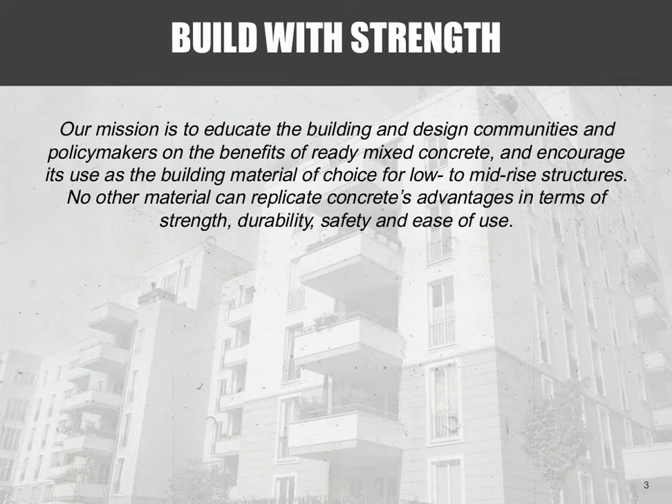For those of you who are not aware, we are Build with Strength, a coalition of the National Ready Mixed Concrete Association, and again, today we'll be focusing on a core attribute of concrete, resiliency, especially in the face of natural disaster. Specifically, one of the things that brought this to mind, and the reason why we're doing a webinar, has been the devastation brought on by Hurricane Matthew hitting the southeastern United States. But for those of you who are familiar with this, we know this is nothing new, and that cost from Mother Nature's destruction has been seen in all regions of the country.

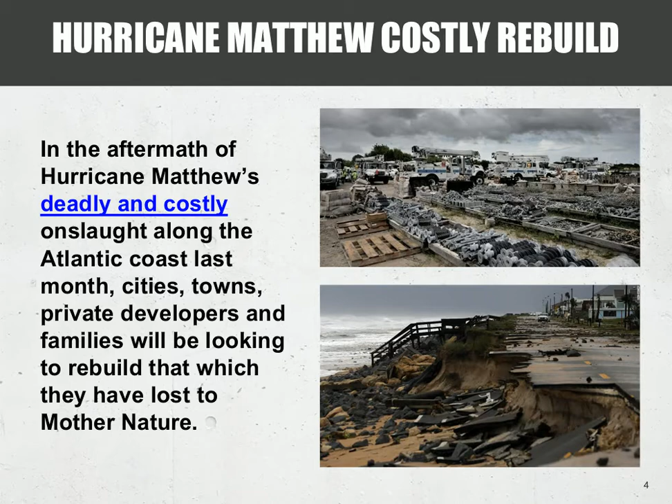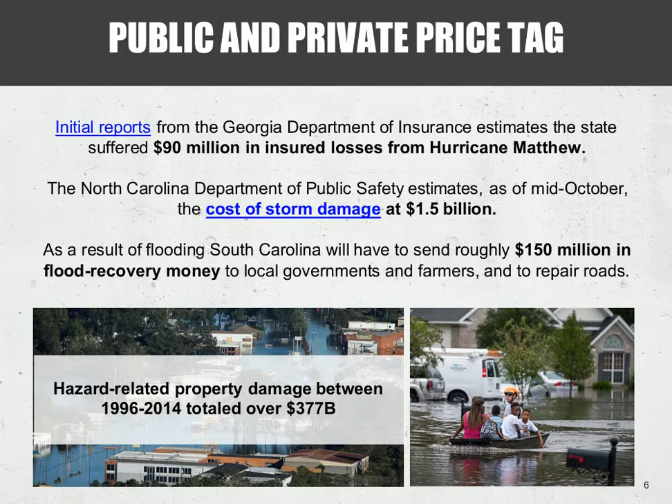Specifically, when it comes to loss of life and property, we've seen reports from all over the Southeast, starting in Georgia with $90 million in losses, North Carolina with $1.5 billion, and South Carolina with $150 million. More generally, between 1996 and 2014, there's been $377 billion spent on rebuild efforts because of destruction.

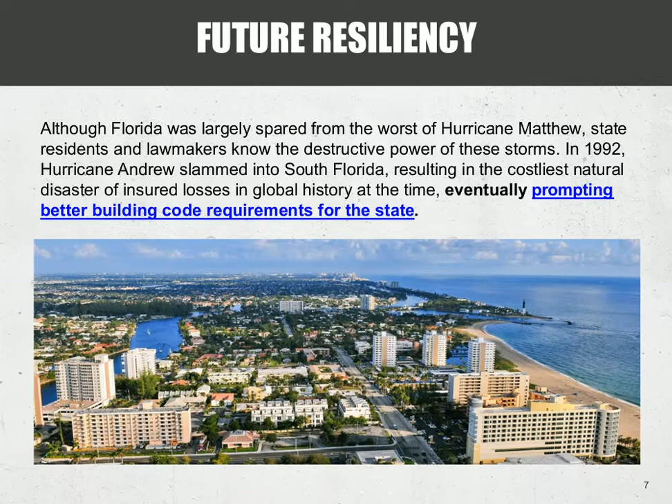We know a lot of these places and municipalities have already started thinking how they're going to rebuild, and what we're here today to urge people to do, and what we're going to continue to urge people to do, is to rebuild in a manner that really takes into account the future, not just the here and now. And the way that you do that is by thinking about resiliency. One thing that we saw in Florida after Hurricane Andrew, for instance, were laws put into place for better building codes with resiliency in mind, not just speedy recovery, but long-lasting recovery and cost savings.

We brought today with us on this webinar Dr. Jeremy Gregory from the Concrete Sustainability Hub. Now I'm going to turn it over to Jeremy to talk about the science behind hazard mitigation and the science behind building with strength. Dr. Gregory? Great. Thanks so much, Kevin.

Can everyone hear me? I'll take that as a yes. I hope so. Okay, good. Thanks. All right, so I'm really glad to be here.

As Kevin said, we've been thinking a lot about resiliency and how you quantify that. And what's interesting, we are the Concrete Sustainability Hub and spend a lot of time thinking about concrete, but concepts like resilience can actually apply to many different systems. What I'm showing in this chart is basically what we mean by resilience. On this chart, the x-axis is time, and the y-axis can be the performance of any kind of system.

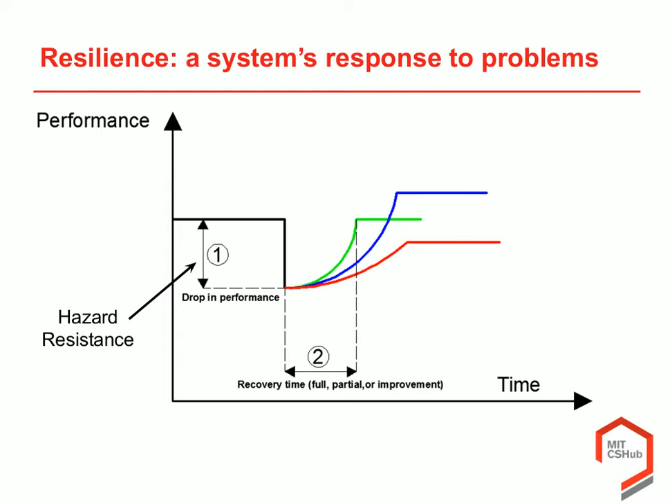We use a really specific term, hazard resistance, to talk about that initial drop in performance, and that's really what I'm going to be talking a lot about today: hazard resistance for buildings. If you go to the next slide, our research is really motivated by taking a life cycle perspective to be able to assess resilience and hazard mitigation.

And I think one of the challenges is that when we think about buildings, and let's say we're talking about a residential structure here, you may end up doing a comparison between two alternative designs, one that's built to a lower design standard and one that's built to a higher design standard. They may look exactly the same from the outside and be in the same location, but presumably the lower design standard is going to have a lower initial cost and the higher will have a higher initial cost, but they'll have different performance over their life cycle.

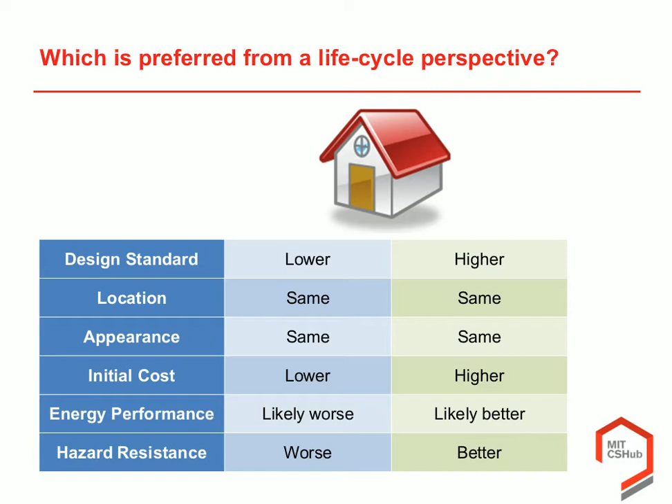The lower design standard will likely have a worse energy performance and a worse hazard resistance. The real challenge in the research is basically how do we quantify the benefits of that higher investment over time, and then how do we incorporate that into decisions. So on the next slide, I'm going to show what we've done in the hub, and that is to try to incorporate, in particular, hazard resistance into a life cycle cost approach.

So a life cycle cost analysis, as the term implies, quantifies all the costs associated with a building throughout its life cycle. So we include those initial construction costs for building the building, its energy consumption, wear and tear, doing repairs over time, but what we also include is costs associated with repairs due to hazards. And the way that we do that is combining the probability that a hazard will occur with the damage that would likely occur from that hazard. So what we include in the life cycle costs is basically costs due to repairs from hazards. And on the next slide, I'll get a little bit into how we do that.

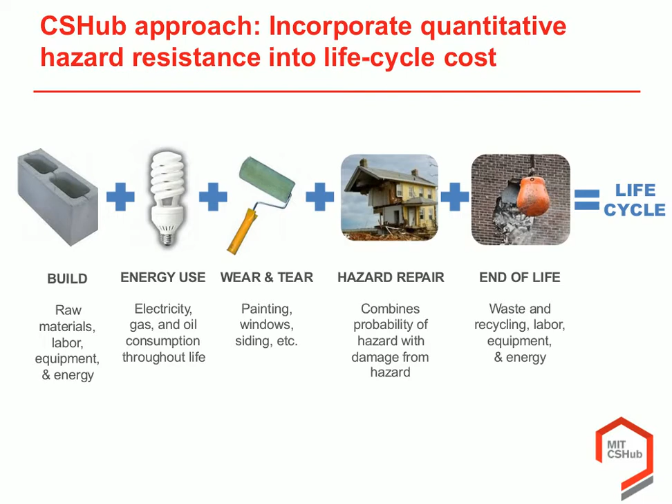Essentially what we do is we start with the probability that a hazard will occur. And if you could just advance to that next slide. We start with a probability that that hazard will occur, and we get this from government data that basically says here's the likelihood of a hurricane of a particular intensity, and then we combine that with what are known as fragility curves for buildings. And these basically say for a particular intensity of hazard, here's the likelihood of damage.

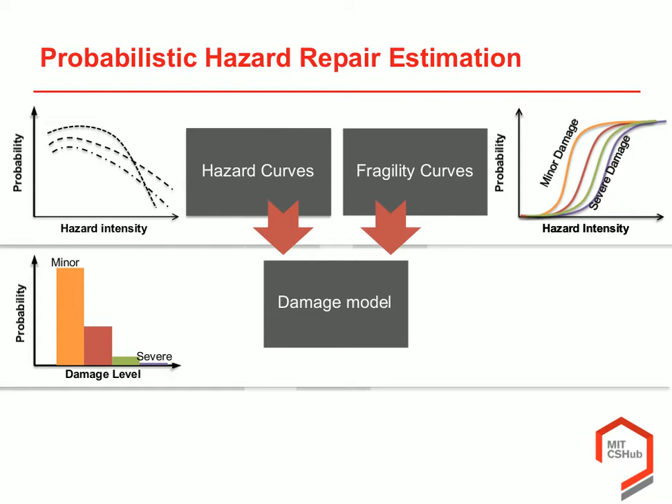We combine those, and then basically over an analysis period, like 30, 40, 50 years, we say here's the likelihood of damage to that structure from a particular hazard. So we can say likelihood of minor, moderate, or severe damage, and then also say here's the amount of costs associated with doing repairs to that damage. What we can do is then combine those into that life cycle cost analysis to say here's the initial costs associated with two different alternatives, and then here are the life cycle costs associated with doing repairs over that life cycle.

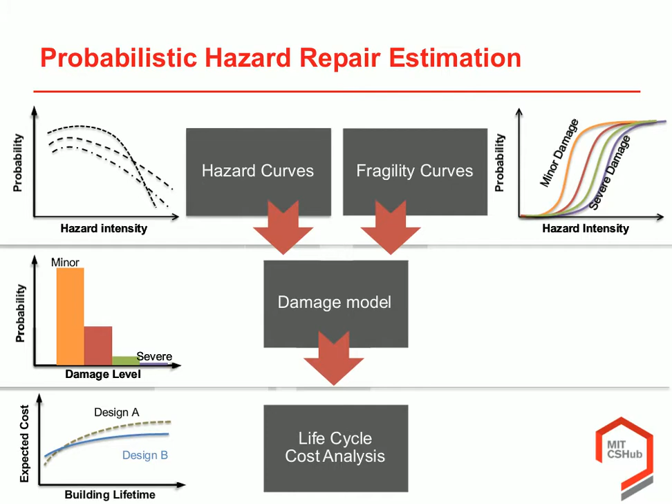So people are used to thinking about a payback period for things like appliances or utilities where you have higher initial costs but then lower operating costs. We don't usually think about that for buildings, and that's what we've been trying to do in this space. So let me show you an example of this in the next slide, where we looked at a residential structure in 3 different locations, San Francisco, Charleston, and New Orleans.

And in each location, we looked at a minimum standard design and an enhanced design that had been enhanced to mitigate against the impacts of hazards. Now, San Francisco has earthquakes, New Orleans has hurricanes, and Charleston has a little bit of both. And what this chart is showing is the life cycle costs associated with each of these buildings. So red is the initial cost, green is costs associated with energy consumption, the purplish colors are associated with standard maintenance and then more substantive improvements, and then the blue colors are related to maintenance or repairs due to hazards, either due to earthquakes or hurricanes.

And what's hard to see is that there's a darker blue color associated with earthquakes, and in this case, you can't even see it in San Francisco. And that's mostly due to the fact we're talking about a residential structure in San Francisco, and that there's a small likelihood of earthquakes occurring. I think this chart would be very different if we were talking about taller commercial structures.

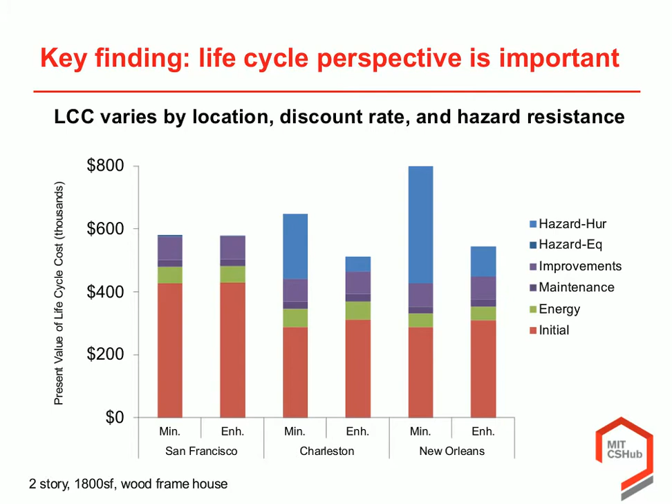What you see when it comes to the hurricanes in Charleston and New Orleans is that the life cycle costs are much more substantive for a minimum design when compared to an enhanced design. And as a consequence, basically what that means is that for a minimum design where you haven't mitigated against hazards, particularly in New Orleans, you could be spending more money on doing repairs due to hazards throughout its life cycle than you did in that initial investment.

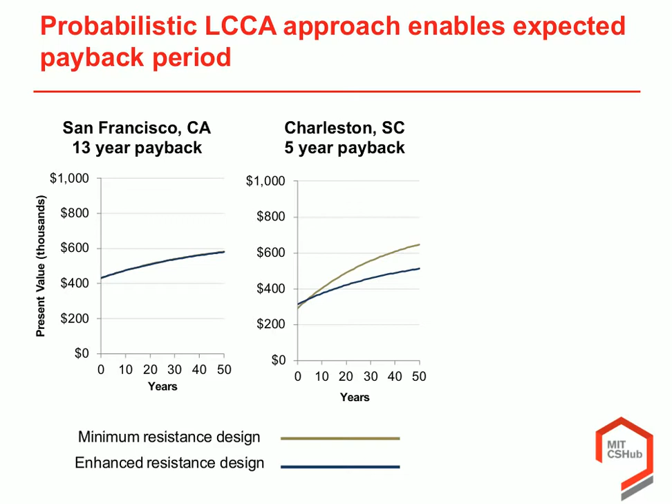And what that allows us to do is calculate a payback period. We're showing here in San Francisco, the curves for a minimum resistance design and enhanced resistance design basically overlap, so you don't really get much of a payback. But if we go to Charleston and also to New Orleans, you can see easily you have a quick payback of like 2 to 5 years.

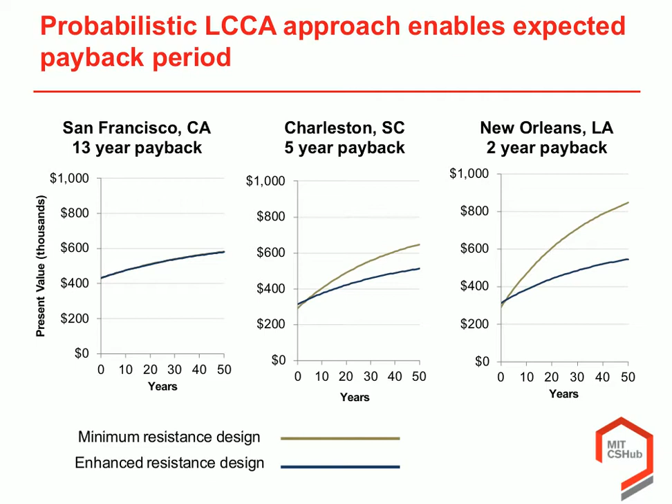And these are not really significant hazard mitigation techniques we're talking about. It could just be improving the connections between the roofs and the walls, things like that, improving windows, doors. So that's why you're able to get a payback period in a reasonable amount of time. The bottom line, taking that life cycle approach really allows you to have that perspective that investing in resilience really matters.

We can also look at several different locations and how this might change. Here's an example showing some different types of specific mitigation techniques that you can use in a couple different locations in South Carolina. And what we've done is actually developed this metric we call the break-even mitigation percent, and that's what's plotted here. And essentially what it does is say, let's say you don't know exactly how much you want to spend on hazard mitigation. Well, for a particular location, we can tell you for building design, here's how much you'll likely spend throughout its life cycle on

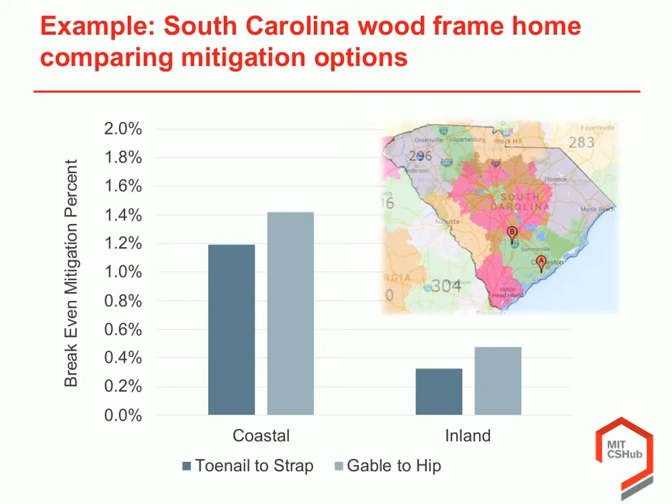repairs due to hazards. And so given that we know that and an initial cost, we can then say, here's how much you should be willing to invest in mitigation in order to break even throughout the life cycle of the building. And the reason we did that is because there is some uncertainty for people about how much they'd be willing to invest, and we can show how that basically varies depending on a particular location.

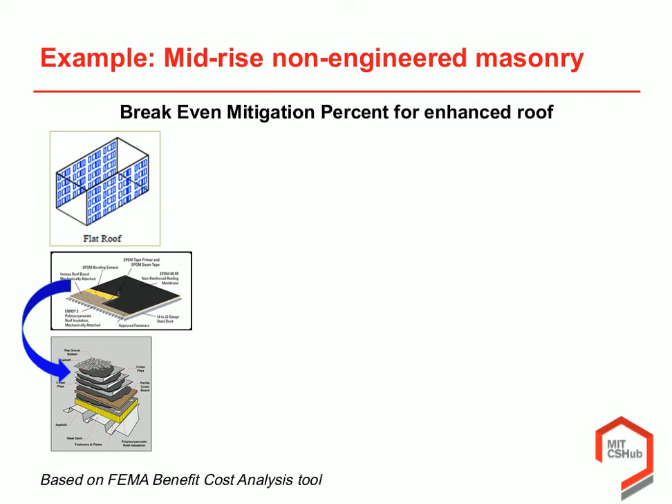So this is showing a toenail to strap, which is one type of mechanism you can use to change the connection from the roof to the walls, and a gable to hip is a different type of roof structure. And so you can see that the numbers vary depending on the location. Another example that I'm showing here is basically changing the way you do a roof in a mid-rise non-engineered masonry. And this non-engineered masonry are basically terms that engineers and architects use to talk about different design approaches.

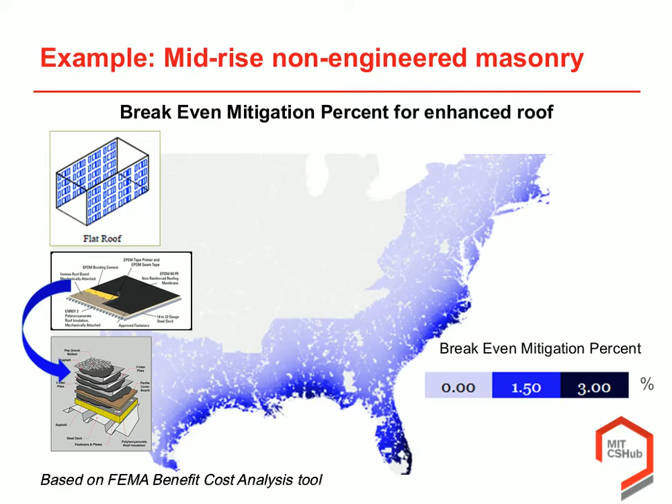And the data that we use all comes from a FEMA benefit cost analysis tool. We've just basically created our own, what we call a meta model, based on running that a whole bunch of times, which allows us to then look at many different zip codes. So you can see those numbers range even above 3%, particularly down in southern Florida, but even a couple percent in a lot of places up and down the eastern seaboard.

So I have another example; the last one was about changing the roof. You can also go from a non-engineered wood design to an engineered concrete design, and that non-engineered versus engineered, my understanding is they're just terms about how much thought goes into designing the building to mitigate it against hazards. And we have an example here of a multifamily building, and let's say we're using a rough number of $10 million to create that building.

What we calculate is that you're going to spend $500,000 on that non-engineered building, using this example of Galveston, Texas, throughout its life cycle on repairs due to hazards. Whereas a more engineered design, you would only spend $165,000, so a fraction of the cost. And so it shows you that basically you could spend $340,000 on break even expenses. So just a couple percent basically, but that can really go a long way to mitigating against the hazards. And what you can see once again is that we can go above 5% in some places that you'd be willing to invest.

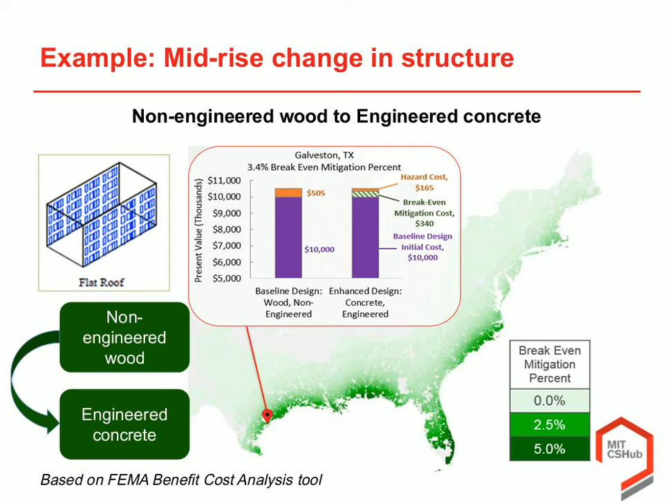So the basic message that we have is that taking this life cycle perspective is really important because it allows you to understand how investments in hazard mitigation are going to pay off over time. And there are many different strategies that can be used to do that, but what we really want to encourage is taking that perspective on how are my initial investments going to pay off in the future by mitigating against impacts of hazards.

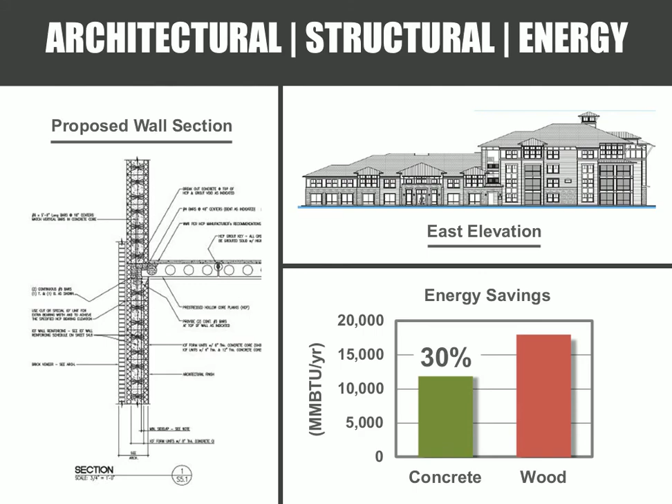What's really important is that we're able to provide these concrete solutions at a reasonable cost with contractors and suppliers that can help build these structures. Now, concrete construction is, of course, ubiquitous. It's being used all over the country and the world, for that matter. But oftentimes, these systems that are designed specifically for disaster resilience have some unique characteristics that we need to accommodate in design. Next slide, please.

So on top of that, of course, resilience has a foundation in green building or life cycle analysis, in the sense that if you design a building that is obsolete after its first encounter with a natural disaster, that is not very green. For example, if you use super energy efficient windows, or super water efficient toilet fixtures and so forth, if they end up in a landfill after the first hurricane or earthquake, that's not very sustainable.

So what we can do, as part of our design team, is offer these services that can build a building not only to resist disasters, but also help lower environmental impact throughout the life cycle. Part of that is, of course, energy savings, but on top of that is using the most energy efficient, sustainable building materials available. Next slide, please.

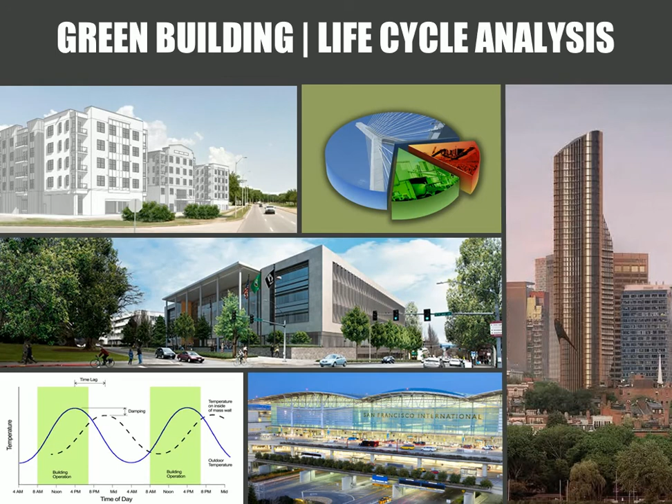So this program is national in scope. Of course, we have headquarters outside of Washington, D.C., but we have people in the field that can help to support developers, design professionals, contractors to design and build buildings to meet these resiliency criteria along with sustainability criteria.

And the way you take advantage of this program is basically you go to the Build with Strength website, buildwithstrength.com, and you go to the Concrete at Work section, and in there is an opportunity to submit a project for us to evaluate. And what we do is we produce a report that provides guidance as to how one would design a building to meet these criteria.